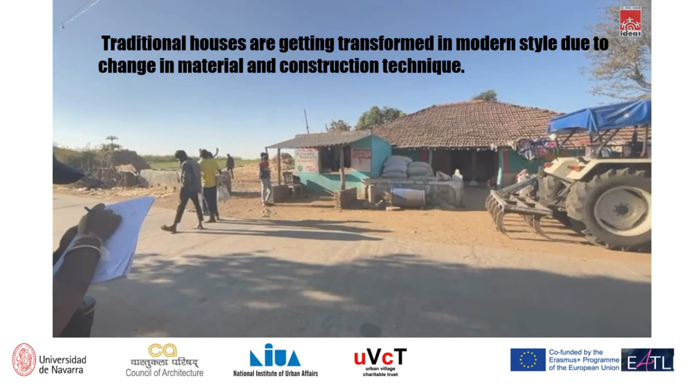Here we explore how infrastructure defines and limits everyday life in Moya Kuhi. The photographs show the village entrance and typical house clusters. The village has 52 houses, with the majority being traditional, constructed from mud and terracotta tiled sloped roofs. A minority are modern or hybrid structures. Educational infrastructure includes a primary and a middle school. Religious life centers around a temple placed strategically in the village core.

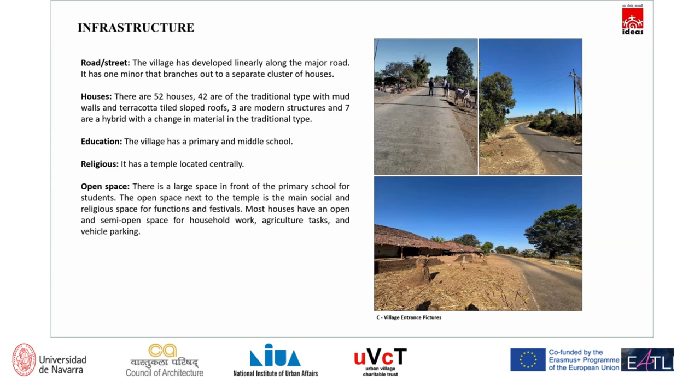One of the most socially active spaces is the open ground in front of the primary school and temple, used for festivals, children's play, and community meetings. Most homes have adjoining open areas for storage, work, and vehicle parking. Despite these organic provisions, modern infrastructure like stormwater drainage, drinking water pipelines, and street lighting are noticeably absent, which impacts the community's hygiene and safety.

The first major set of issues: physical infrastructure deficits. The accompanying image shows the absence of drainage and water infrastructure, clearly highlighting the problem. The village suffers from irregular water supply, especially during summers. This not only affects drinking water availability, but also limits irrigation, household hygiene, and sanitation.

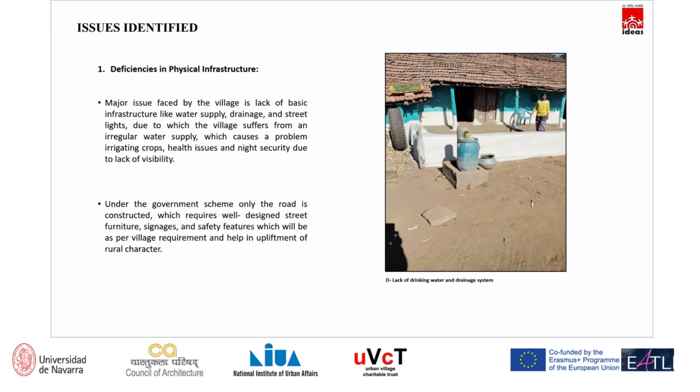Moreover, there is no street lighting. At night, navigating the roads becomes unsafe, especially for children and women. Even the road constructed under government schemes lacks basic supporting features. There are no footpaths, no signage, and no barricades for safety. These omissions compromise the usability of the infrastructure and present a serious need for design improvement.

The social infrastructure gaps that directly impact the quality of life. There is no health center within the village. In emergencies or for routine care, people have to travel 48 kilometers to Harrai. Additionally, there's no community hall or common gathering facility. Social and religious festivals are celebrated in open, unstructured spaces without any amenities like seating, shade, or lights.

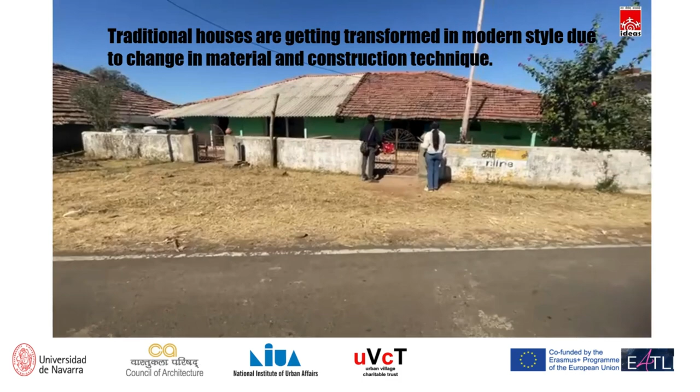This video shows a shift from traditional to modern housing is clearly visible. Homes that once reflected local materials and sloping tile roofs are now being replaced with boxy RCC structures. These newer homes often lack verandas, shaded courtyards, and architectural features that define the village's original identity. While modern construction offers durability, it's happening without design guidance, slowly erasing the cultural coherence of the built environment.

We now move towards solution-oriented thinking. The first micro-project proposed is a comprehensive street design intervention. In Moya Kuhi, the street is not just a physical path. It is a social spine, a space where children play, elders sit, and community life flows. However, its current condition is unsafe and underdeveloped.

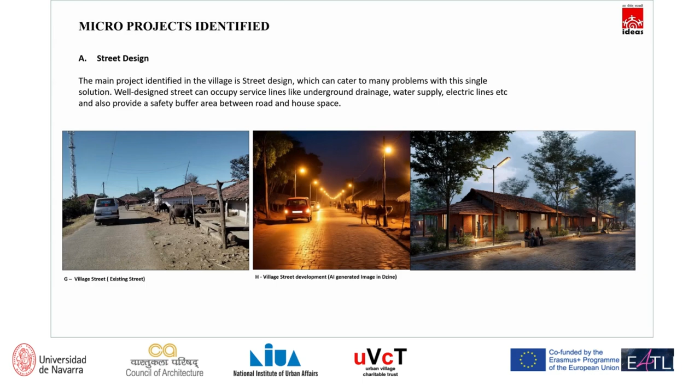This proposal aims to integrate underground utilities such as water supply lines, drainage, and electrical cabling below a newly designed street surface. The surface will include a walking path, planting buffer, and protective edge elements. The images on the slide show a comparison of existing broken stretches of the village road and an AI-generated vision of the redesigned street that is accessible, neat, and context-sensitive. The upgraded street is imagined as multifunctional, safe for walking, practical for services, and reflective of village character.

The idea is to provide both design guidance and prototyping support so future housing, especially under schemes like PMAY, enhances, not erodes, village character. This also empowers villagers to see the value of culturally appropriate design.

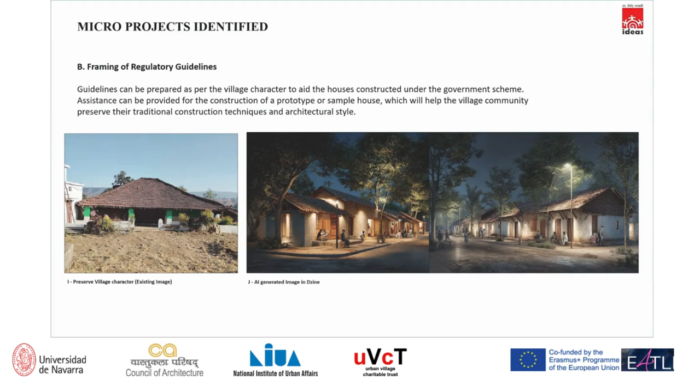Set within a modest footprint and constructed using local materials, this center could serve women, elderly, and youth alike. It will strengthen the community fabric, offer dignity during public events, and reduce dependence on distant towns for health or training services.

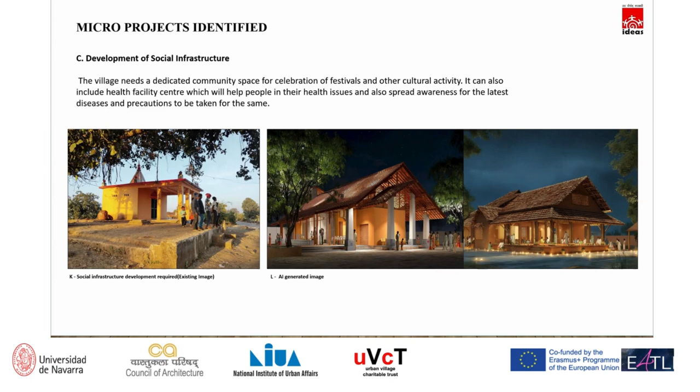These slides bring the vision of the redesigned village street to life through conceptual renderings developed by a fourth-year student. The visuals show not just a street, but a reimagined public space. Seating areas, lighting posts, shaded corners, and clean pathways reflect an inclusive and safe design. The design highlights both existing conditions and AI-enhanced views.

The concept is rooted in practicality, retaining the rural charm while embedding modern features like solar street lighting, proper stormwater management, and designated pedestrian paths. This is more than beautification. It's infrastructure that restores dignity and functionality to a critical community space.

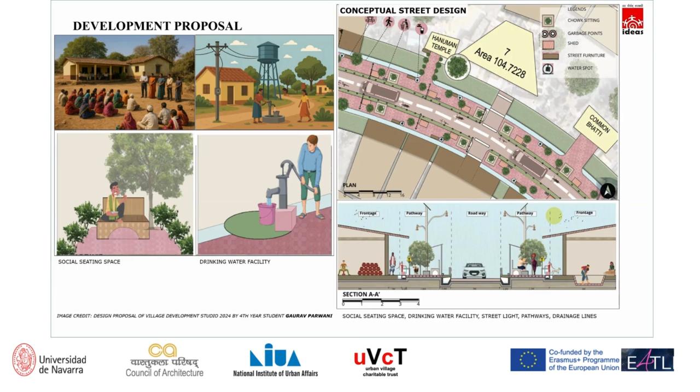Building on the need for social infrastructure, these slides elaborate the design proposal for a dedicated community and skill development center. The center includes spaces for health checkups, training activities, group meetings, and festival celebrations, all within an architectural design that respects rural building language.

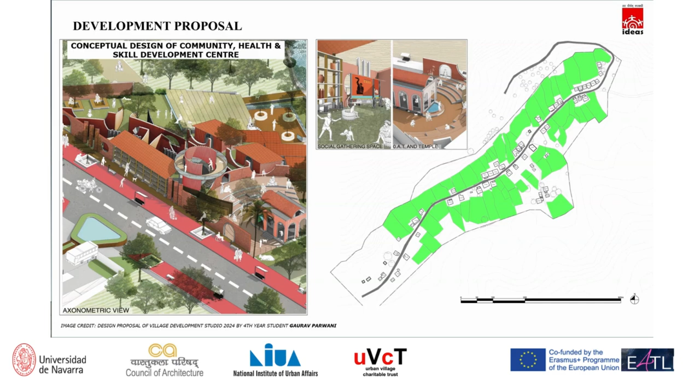The design proposal featured here uses locally available materials and incorporates flexible spaces to accommodate evolving community needs. This center is not only a building but a catalyst for empowerment, particularly for women and youth who lack access to such services in their current environment.

This slide transitions us into the technological arm of the proposal. Given that Moya Kuhi lies on steep terrain, physical planning becomes logistically and spatially complex. Here, we use virtual reality, VR, to create a terrain-responsive base map, helping planners visualize slopes, flows, and built forms before implementation. In parallel, AI-generated rendered images allow stakeholders to see future possibilities without physically altering the village.

The visual on this slide shows such a simulated render, a design that blends planning with prediction. This methodology is vital for reducing error, increasing transparency, and improving design communication.

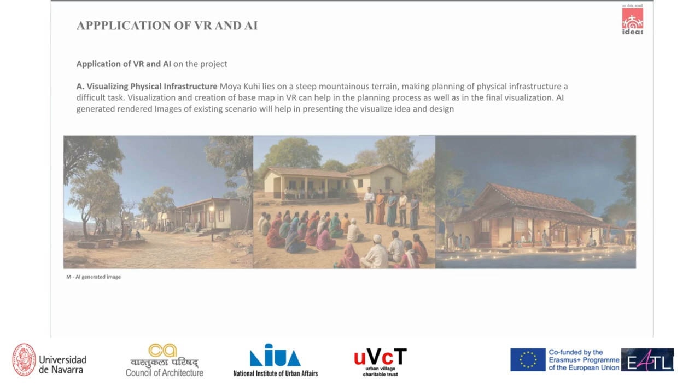In this part of the tech-driven vision, 360-degree video mapping is used to capture the existing village environment. This immersive record is layered with proposed interventions, enabling before and after comparisons. Such visualization is essential in helping both authorities and residents understand the tangible impact of development.

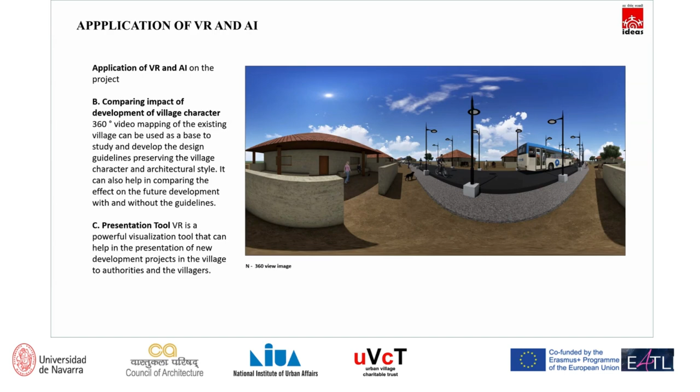Moreover, VR becomes a presentation and training tool useful for communicating ideas to stakeholders unfamiliar with architectural drawings. The slide illustrates this through an example of a mapped street overlaid with design suggestions. This approach democratizes design and helps foster local participation in planning.

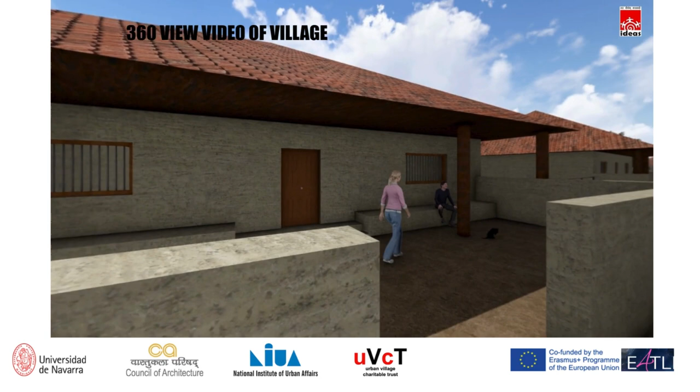It captures the immersive interface of the 360-degree VR walkthrough created for the village. It is not just a tool for planning, but a form of digital storytelling, allowing planners, villagers, and stakeholders to experience the space as it exists today.

Through this immersive view, we preserve the essence of Moya Kuhi, its textures, its landscape, its spatial behavior, even as we prepare it for a more structured future. It ensures that proposed changes are not just visible, but deeply understood.

As we conclude, we revisit our core objective. Moya Kuhi is more than a rural case study. It is a living, breathing village trying to balance tradition and transition. This study shows how community-centered planning, respectful of both culture and context, can bring about meaningful change.

We thank the jury, our faculty, and the Moya Kuhi residents whose openness made this study possible. We invite you to see this proposal not just as an academic exercise, but as a blueprint for real-world rural transformation.